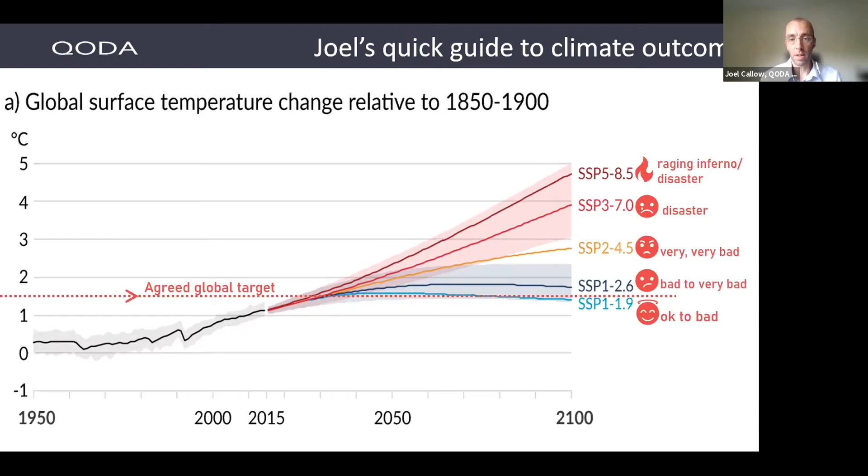And I would suggest that the okay to bad scenario is probably our best bet to hit this globally agreed 1.5 degree Celsius target. So that's the biggie, 1.5 degrees. I think nearly all of us are aware of that reality now. That's what we're trying to do. And that's therefore what the rest of the presentation really is discussing. How do we get ourselves, our country and our entire planet down to a 1.5 degree climate change outcome in the future? So next slide, please.

Here's what has to happen. So this is the CO2 emissions of the whole of humanity, all added up together, which must have been a bit of a job. These, of course, are projected out from today through to 2100. And these are the scenarios the scientists use to predict what will happen to climate change. So they're not allocating likelihood to these scenarios. They're simply saying, this is what could happen if we do this or that or the other. And there's been a lot of debate about that in the papers. I won't say much more about that.

What I will say, though, is they're not very good at naming things. So the one we need is the little light blue line at the bottom, which is handily titled SSP1-1.9. I think that's not especially catchy, so I call that one the happy blue line. There's actually a slightly less happy blue line just above it.

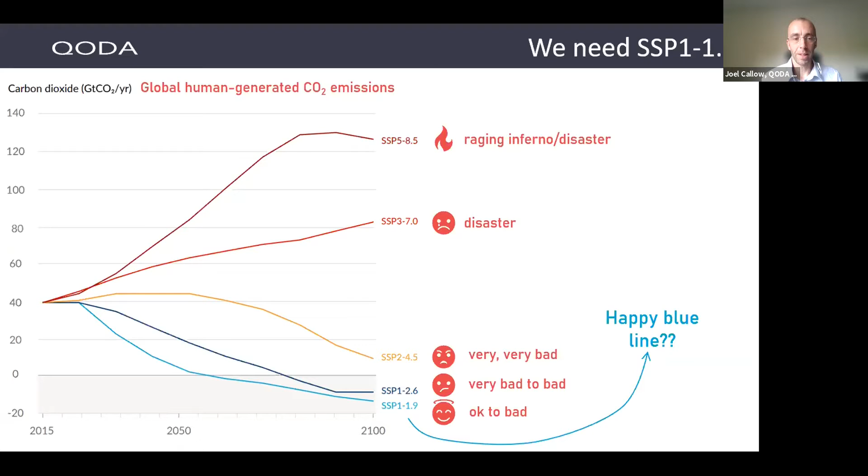But the happy blue line, or the light blue line, is the one that delivers confidently, or reasonably confidently as far as the scientists are concerned, a 1.5 degree-ish outcome. And then the other scenarios variously produce much, much warmer outcomes with much worse global impacts really across humanity. So we need the light blue line, a happy blue line, and we need to think about how on earth we deliver that. So next slide, please.

Just one more brief mention about climate change, and then we'll roll into the next part of this. That is to say that climate change is not a result of today's emissions, it's a result of all our emissions so far to today, and therefore what happens in the future too. We are heading up this line steadily, moment by moment, day by day, month by month, as we collectively emit more carbon. Normally flatlining is bad news. Certainly for human beings, flatlining is very, very bad news. But for cumulative carbon emissions, flatlining is exactly what we need to do.

So this line's got a gradient at the moment, it's heading up. What we need to do is stop emitting carbon so that all the cumulative emissions that have happened so far are all that then happens. So we reach global net zero, this graph becomes horizontal. And that's what the scientists need us to do. That has to happen before we hit the end of the blue band on the graph here.

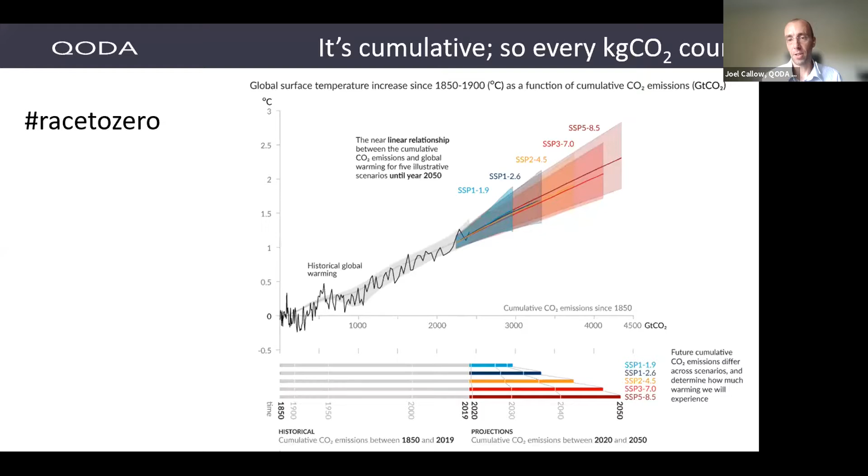So you can see we're working our way up through the blue band at the moment, and we need to stop emitting carbon before we get to the end of it, which is 3,000 gigatons CO2. So that's what we're trying to do. Cumulative carbon, every kilogram counts. So we need to cut now and cut hard. That's the message. Okay, next slide, please.

So next, we're going to zoom in a little onto this term net zero carbon, which is the title of today's session, and it's a term we're all very familiar with, although it was only coined relatively recently, and we talked about carbon neutral historically, so you may be familiar with that term. But today we're considering net zero carbon. What does it mean for us as buildings professionals, and what does it mean for everybody else as well? So next slide, please.

At a very basic level, net zero carbon isn't too difficult to define. It means we stop consuming any sort of fossil fuel, but specifically burning them, and by that we mean coal, oil and gas principally, though methane is also an issue. And instead of using those, which are a linear, non-cyclical consumption pattern, we move to a cyclical consumption pattern whereby the things we use regenerate automatically.

And that includes the materials we use, but crucially, the energy. So wind turbines, solar panels, biogas, and so on. Anything that can renew cyclically and continue to operate in perpetuity in the future is renewable. And that's what we need to swap over to globally. So far, so easy. Net zero doesn't sound too difficult. Next slide, please.

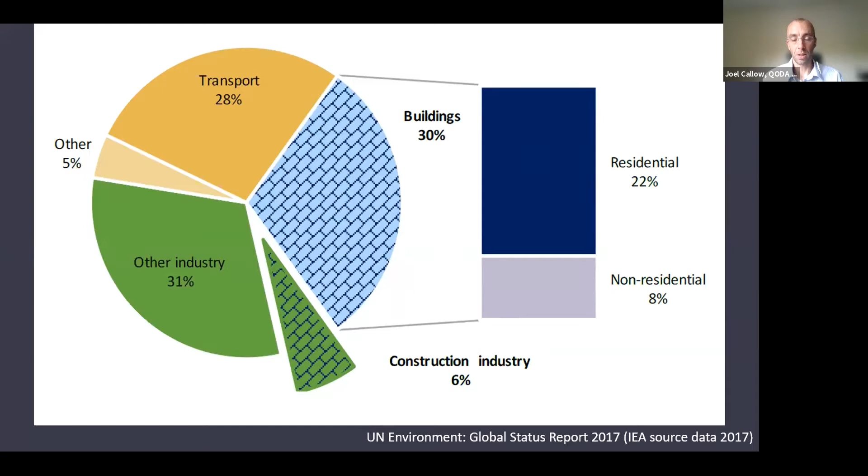But there are, of course, some challenges, and this is where we begin to focus more on our own industry, the industry of construction and building operation. So you'll see that constructing buildings emits about 6% of the global human carbon emissions total, but operating buildings, particularly residential buildings, contributes about another 30% to the global total. So buildings are, as you're probably all aware, a very, very substantial part of the problem, both operational, which we're focusing on today, and embodied carbon, which is the construction part of that pie chart. The next slide, please.

Okay, so now let's think about net zero operational carbon for an individual building. And this is where it gets a bit fiddlier, or let's say a building or a site, a collection of buildings. So we've zoomed right in from the global to the national to the local. And we're saying at this point, net zero carbon for us, and this is the sort of go-to definition I think that the industry is now using, give or take, is that over a given average year,

so this is a notional thing, not an actual thing at some level, over a notional year, the energy consumed by a building, demanded by it as a result of the things happening inside it, is balanced by the amount of renewable energy that that same building or site generates. And if those two balance over the course of a year, or indeed if the renewable energy is greater than the energy consumed or demanded, then you have a net zero or better than net zero carbon building. That's not 100% accurate, but it's the nearest we can get to a simple definition, I would say.

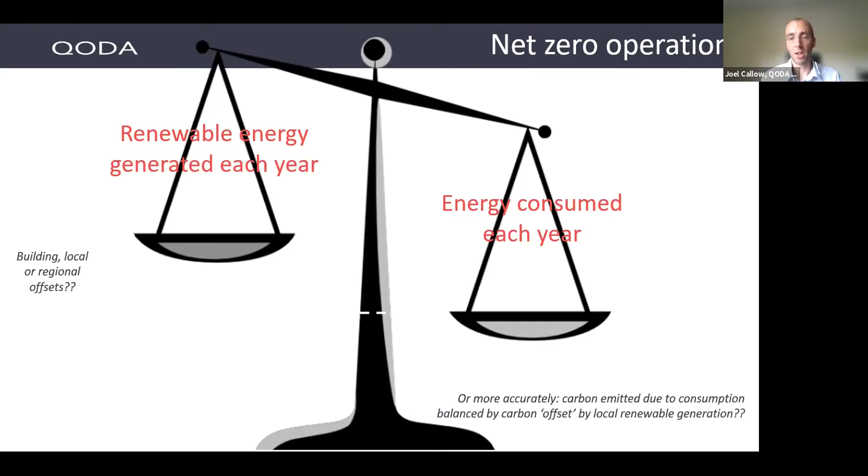This is ignoring things like offsets, and also it doesn't consider the idea that green tariffs via the national grid or gas grid have any real benefit to a building. So we're saying local balance between energy generated and energy consumed is net zero. Next slide, please.

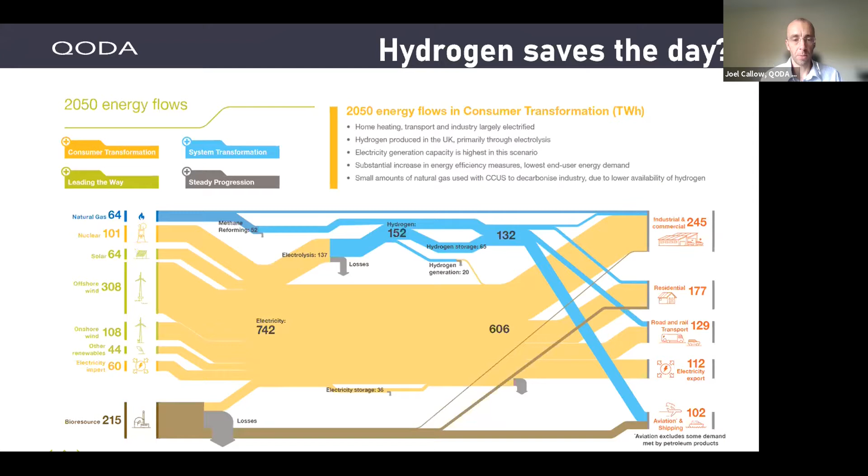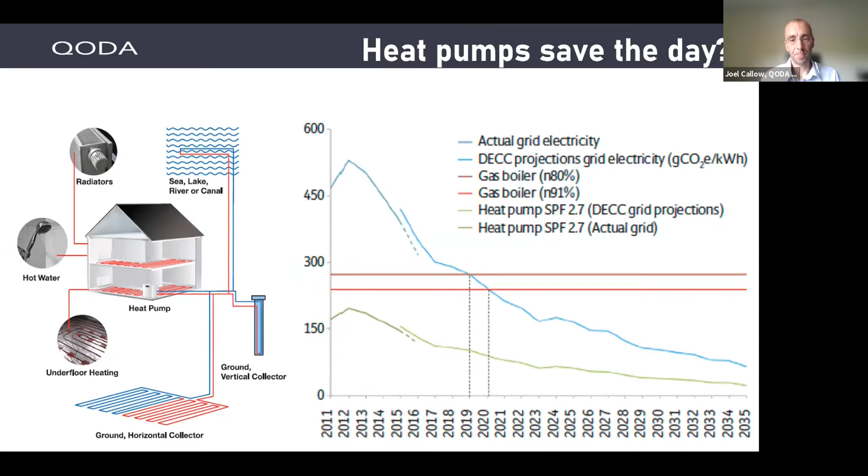Imagine we all switched off our gas boilers right now and went through this coming winter without any access to gas. And miraculously, we had 20 million heat pumps available that we'd all installed at the same moment, ready to use for the winter. What would happen is we would demand from our national grid enormously more electricity than is actually available at peak demand across the winter. Let's look at the next slide, and it explains that a bit more clearly.

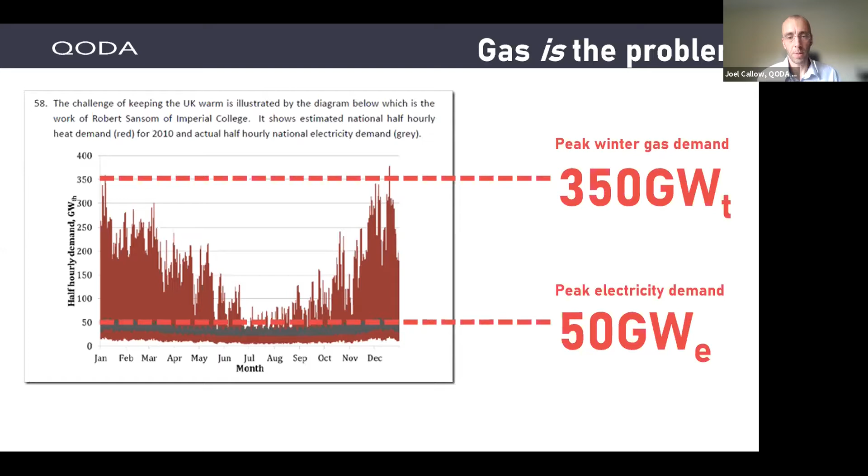So 350 gigawatts is our gas demand. That's the problem today. Got to switch it off, got to stop using gas. Gas is a fossil fuel. There is a biogas question, but that really hasn't got the scale to answer our 350 gigawatt problem. So even with super duper heat pumps, and I'm a big fan of super duper high efficiency, high COP heat pumps, you still end up with a peak demand of circa 120 gigawatts. And that's in addition to what we normally use electricity for anyway, including now charging electric cars.

So we've got a problem. What we need is a giant gush of electricity from a high pressure tap, if you like. What we've actually got is a trickle of electricity from not at all a high pressure tap. And we've only got 50 gigawatts available instead of the circa 200 we probably need all in for all of this going on at the same time. So we've got a capacity problem. We can't simply swap to heat pumps, in a way similar to the idea we can't simply swap to hydrogen because there isn't enough of it. We can't generate it easily enough. Next slide, please.

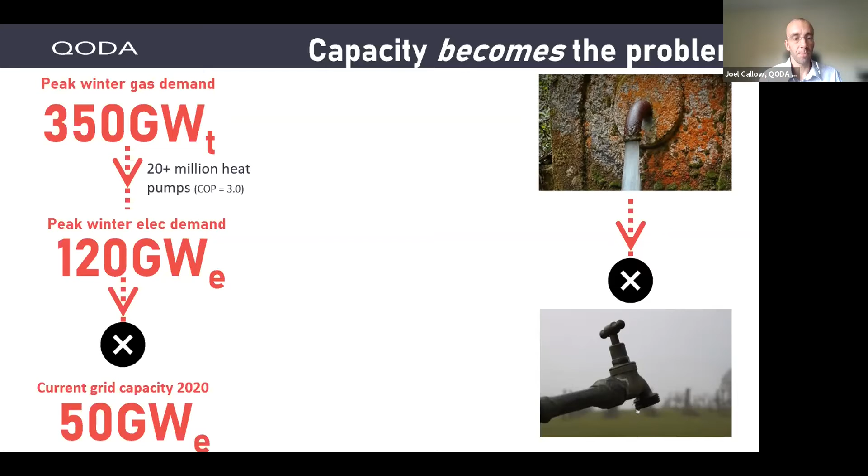So a summary of my points so far would simply be that we can get to net zero on electricity. The problem is there's not enough of it to heat our buildings, even in the best case scenarios, with as much hydrogen as we can muster and the very best heat pumps at the highest efficiency. We simply need too much heat for that system to meet all those energy needs. Therefore, we need to make our buildings less wasteful, both new buildings and all the ones that already exist.

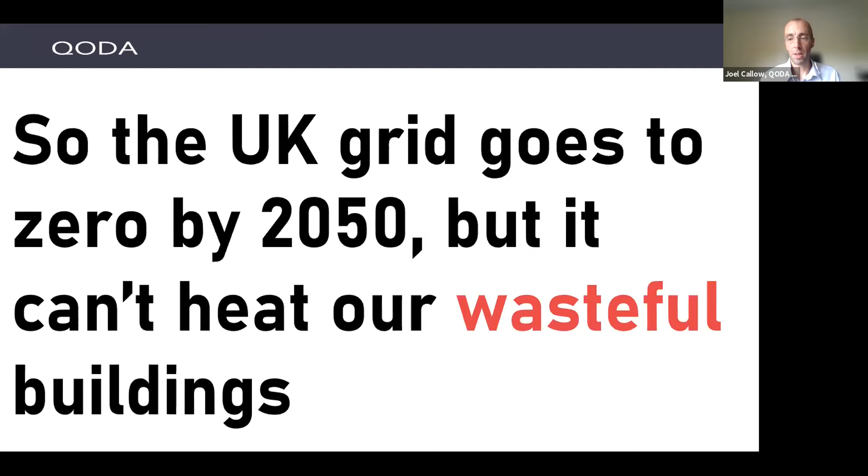There's another challenge as well, and that is that electricity is not cheap. Now, it may go down in price, and there are some projections saying that it will as renewable energy comes online in greater quantities. But on the whole, heat pumps cost more to operate than gas boilers do. That's partly because of the way gas isn't taxed and electricity is. There's some ways we can tweak this, and we can hope government policy follows those sorts of protocols. But overall, electricity is a much more processed fuel than gas. We just dig gas up out of the ground, which is pretty cheap, but we actually have to create electricity or convert energy into electricity from other forms, and that's generally more costly.

So we can't resolve fuel poverty with heat pumps. We have to address the amount of heat that our buildings need as well.

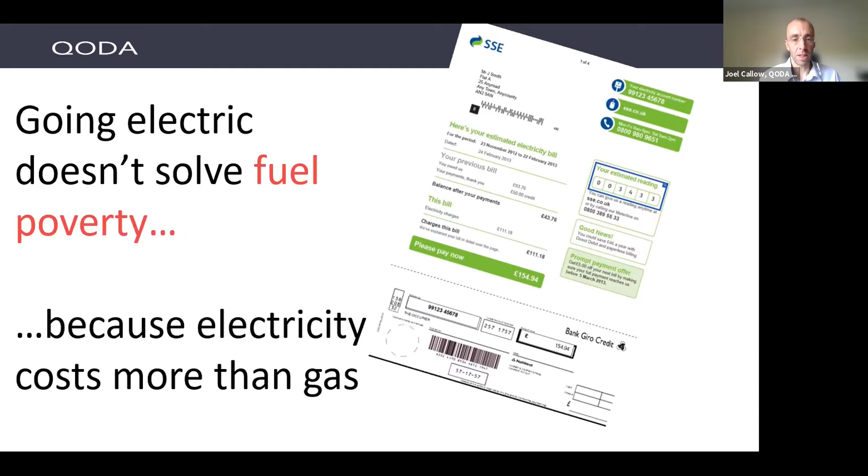In its worst form, concrete has a lot of carbon in it because of its cement content, although there are ways to make that better. Timber is an example of a fantastic material that has actually captured carbon, so has a carbon negative footprint in some ways. The industry hasn't really dealt with embodied carbon up until now.

I want to say very clearly that there are now quite good but complex answers to how we measure and minimize embodied carbon. And if we wish to build buildings with a very low embodied carbon footprint, we can do so, although probably zero would be a bit of a push at the moment for most projects. But it's a very new industry. So unlike operational carbon, which I've talked about for the last few minutes, which has decades of knowledge and case studies and benchmarks and regulation behind it, embodied carbon has none of those things.

And so we're kind of stepping out into a bit of a wild west of slightly unknown performance and a lack of case studies. There are a few, and I wouldn't want to do it down, but I want to warn you that this vital part of our total fight against climate change is much less clear than the operational carbon. So my final slide, please.

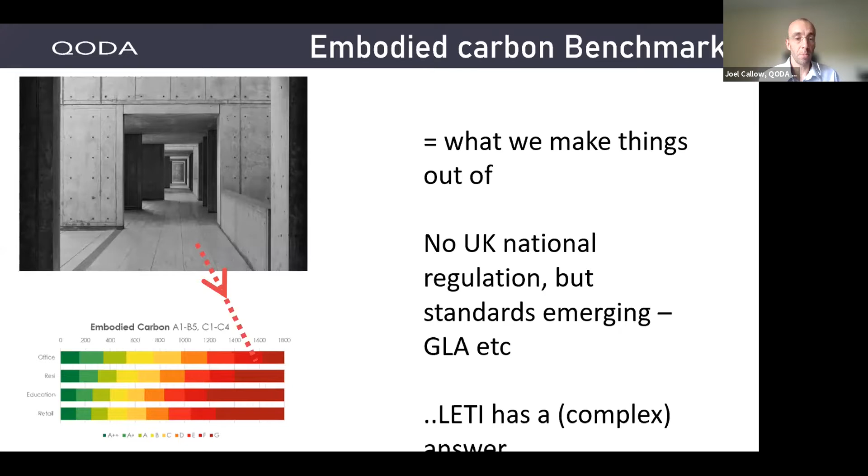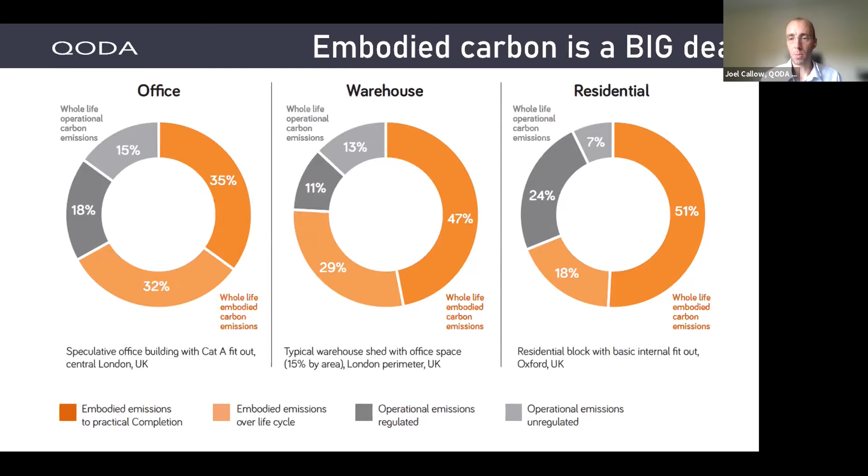So we can't ignore embodied carbon, but we need to be aware that it's an emerging discipline from a fairly low starting point. I think that's a great moment to hand over to Neil and Dido for some more buildings-focused input.

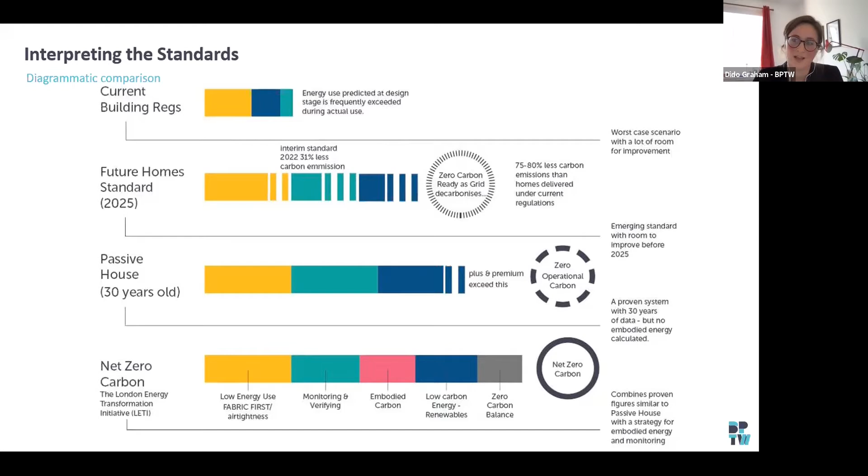This is a look at the LETI definition. LETI is the London Energy Transformation Initiative, and the key things to see are these figures. The low energy use, shown in yellow, is the operational standard we need to hit - that 35 kilowatt and 15 kilowatt figures are incredibly similar to what Passive House gives you. Other key elements are the measurement and verification points throughout the process.

This means ensuring you're measuring what you're producing, what the building's going to do during and after the construction phases - ongoing measurement of the building's performance. The pink section is the embodied carbon, measuring reductions so that everything coming to site and going into the building can be measured and quantified.

On the right hand side, the dark blue looks at the renewables that will be on site, balancing the energy your building is using with the energy you can produce on site. By creating these incredibly efficient buildings that aren't using much energy, you're able to produce the energy you need on that site.

The final element is about balancing your carbon - ongoing monitoring to ensure there's a continued balance and ecosystem of what you've done, staying in balance as you go forward.

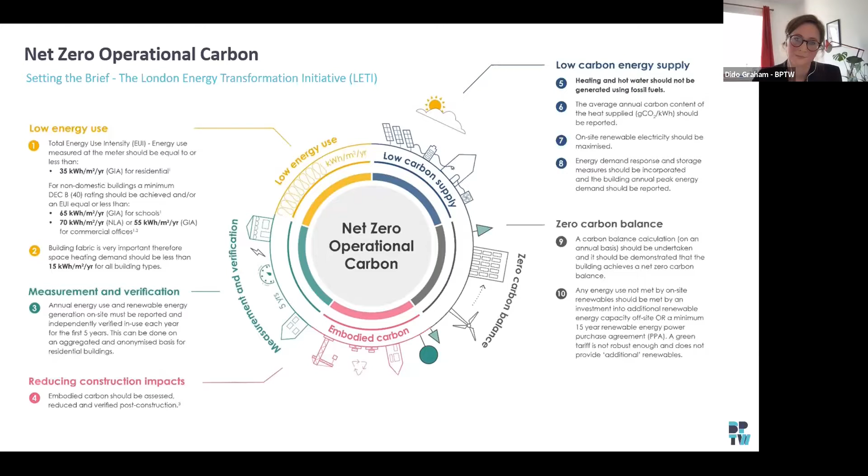This slide is taken straight from the LETI Client Guide, an excellent document to help clients understand how to approach a net zero building. It explains the collaboration that needs to happen and the thread that needs to follow through the whole process, from stage 0 RIBA standards to stage 7.

It also looks at the myths and the problems that clients have raised as issues with net zero buildings - for instance, the cost increase. There's a study by UK GBC looking at the price increase, which is around 3.5% more expensive to produce buildings like this.

But if you balance that out against the benefits you're going to get - not just economical but social benefits, and economical in terms of the energy you're using - it comes out less overall probably. This diagram looks at when the client needs to be involved and their level of involvement with the team throughout the process.

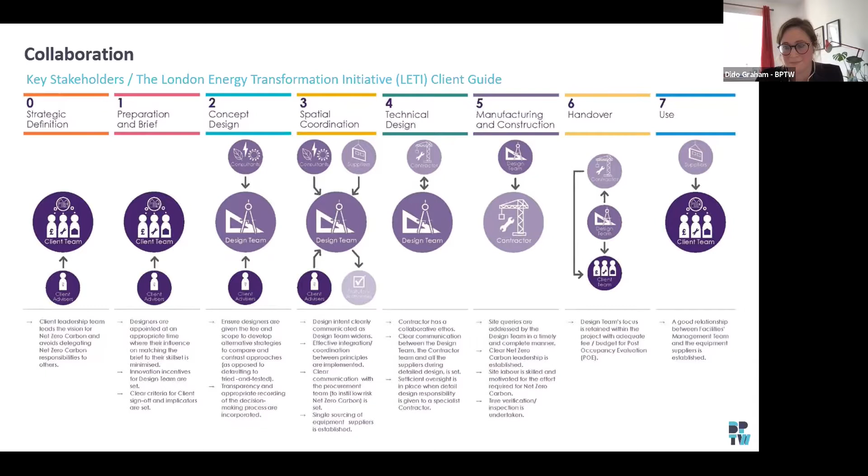As I said on the first slide, how do we go about achieving these figures and hitting the targets? We like to think that the Passive House system is a really good way to do that - creating very thermally efficient, intelligent buildings using the site and thinking about designing well to achieve these things.

But what sometimes gets forgotten when we're talking about net zero is what this actually produces for the people living in these buildings. It creates very comfortable, easy to live in buildings that are easy to run, have longevity, and are really comfortable to be in. That's a really key thing to keep in mind when thinking about this process.

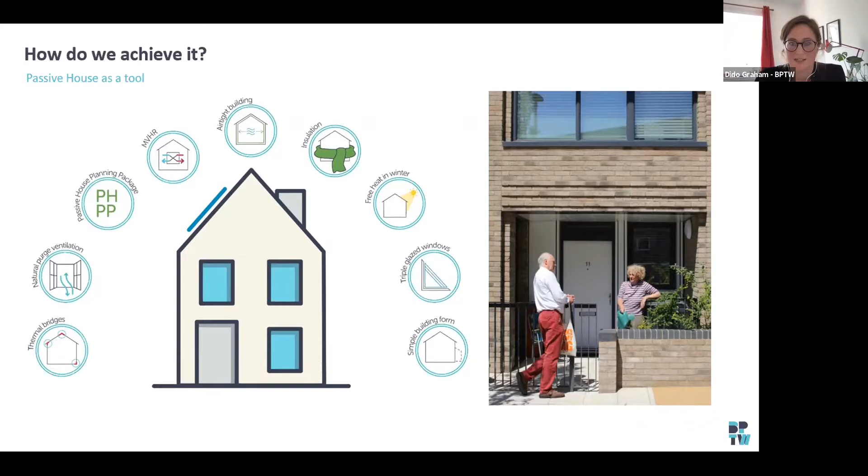This looks at the elements of the design process. The first thing to think about is the site and what you've already got there that you can use to your benefit when designing - orientating the building to gain free heat in the winter, checking if there are trees on site for free shading, and whether there are existing materials or buildings you can reuse to keep embodied energy levels down.

And Neil's going to talk about this building on the right-hand side. So there's an example here, Shakespeare House, that we undertook quite a number of years ago now, but I think it's more to make the point that it's not about new buildings all the time. In this case, this is reusing existing buildings. So this was an existing building within an estate, and we overclad this building, reorganized the internal arrangement, and actually put an additional floor on the top.

And what that did was massively increase its thermal performance. We were able to carefully design the fenestration to regulate the solar gains, etc. Add additional areas for amenity, etc. So there are additional benefits just in terms of actually how the building is used. But overall, what that did was extend the building's life for another 30-40 years without knocking it down. And it sits very well in the context of the existing estate. Some of the buildings changed, some of them didn't.

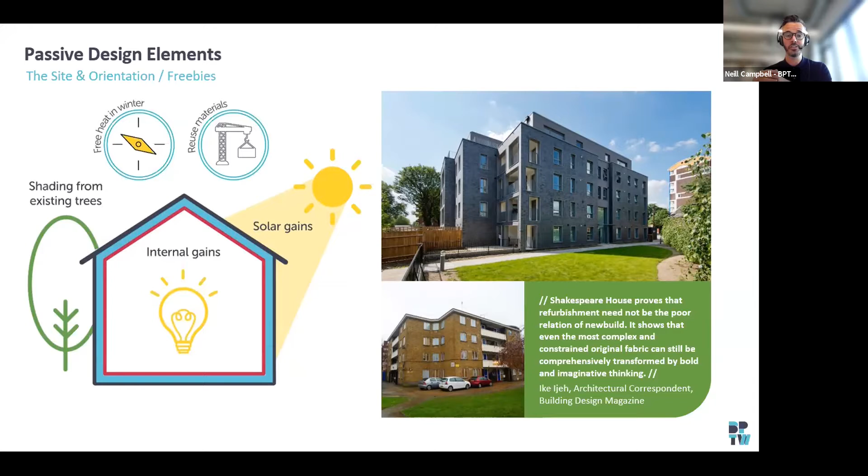So I think what's quite interesting about this, and the briefs that we get, is it's not always about having to knock something down and start again. And that certainly plays to the point about the embodied carbon that would have been ingrained in that building and lost if it was knocked down and then a whole new building put in its place. Okay, next slide, please.

So the next element is thinking about the fabric. I like to think of this like a leaky bucket. If you've got a bucket with a hole in it and you're consistently pouring cold water into the top, it's going to leak out the bottom. So if you can think of the building fabric a bit in the same way, we need to keep that heat inside the building. And how do we lose heat? We lose heat through air transfer, so drafts and badly connected pieces of the building, and also through the fabric. So when one solid material touches another solid material, or there's a connection between the outside and the inside. So how do we avoid that?

So thinking about a highly insulated envelope, keeping the envelope airtight, and also the elements that we put into the site, thinking about detailing very carefully so you're not getting thermal bridges, and also using high quality elements like triple glazed windows that, instead of being your worst element in the building for losing heat, could actually be something for gaining heat. So in the winter, get your free gain, so you're not needing so much energy. Also, obviously, the other things to be aware of are keeping the elements out, so rain protection and wind protection and the normal things that you need to do with the outside of the building. And then that helps to ensure that the energy that you're putting into the building is relatively low and stays in when you've put it in.

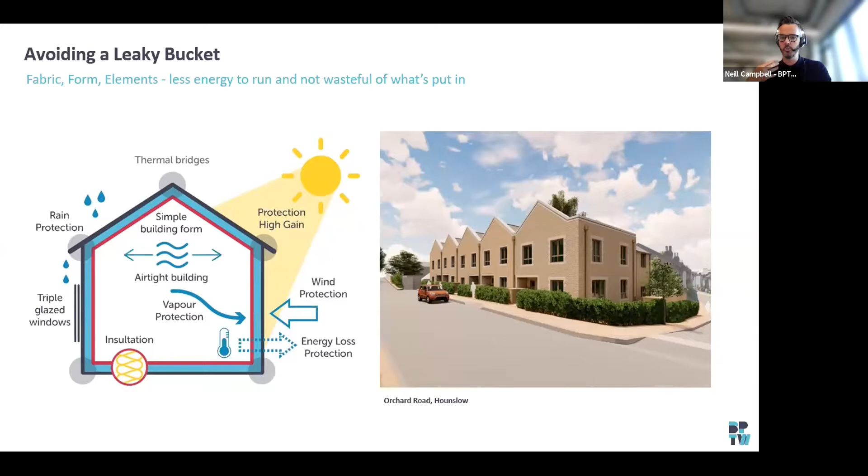Next slide, I'm sorry. And just to touch on quickly, an example of exactly all of those points, which we undertook with Hounslow Council directly, this was very recently. So in this case, our brief was designed to Passive House principles, so not to full certification. But what that meant was that we used those principles through the design to maximise the performance of the building to a very high standard. So here there's triple glazed windows, simple repeated form, very highly efficient thermal fabric, and that is borne out in the architecture, and it creates very simple, beautiful architecture in our view. The next slide, please.

So then you've created yourself an envelope that holds your heat in and is fairly airtight and isn't leaking lots of heat out. So how do you ventilate that? And I think one of the things that people are most concerned about when you talk about passive house or net zero carbon buildings is the idea that you can't open your windows. And I'm going to talk about why that isn't true.

So you have these MVHR systems, which is mechanical ventilation with heat recovery, which is a way of ensuring that all the pollutants that you're creating inside the building are extracted, but you don't then bring very cold air into the building, and you don't lose any of your heat out of that system. So you're bringing cold air in, but it passes the warm stale air that's going out and comes up to the same temperature as the building. So then you've got fresh warm air coming into the building using this system.

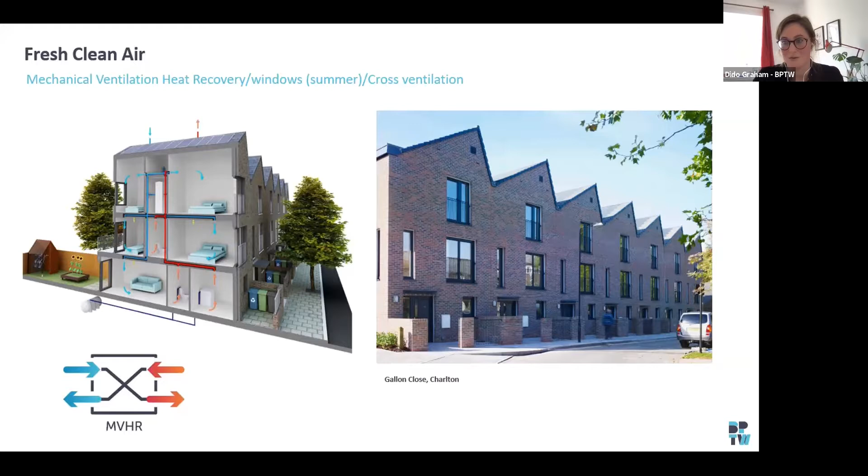But then in the summer, if you're wanting to open your windows, or if you're wanting to get cross ventilation into the house, that's totally possible, and you should do it. But I think the thing to remember is that because we've made the envelope so incredibly thermally efficient, it works both ways. So in the winter, it's stopping the heat escaping, but it's also stopping the heat coming in the summer. So you may not need to, I think, is the thing to remember. Next slide, please.

Okay, so the final piece of this puzzle is the fossil fuels element. Obviously we're trying to reduce the number of fossil fuels on the site, or remove them completely, and we're trying to balance the energy that the buildings are using and what's being produced on the site. So by creating this incredibly thermally efficient building, the amount of energy that you need to produce on the site is actually less than what you would need to produce previously.

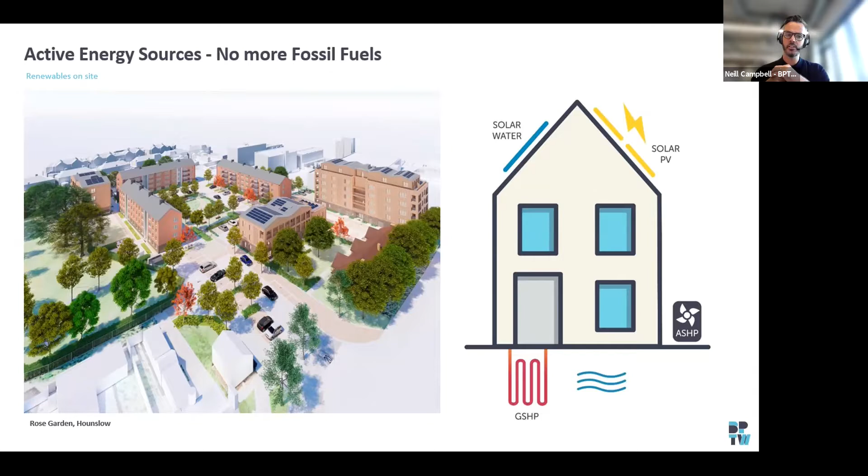Next slide, please. So in summary, I think it's really important to remember that this process isn't just providing net zero carbon buildings, it's also providing healthy and comfortable places for people to live, which have high performance and are efficient and intelligent. So it's improving the current building standard and quality of the buildings that we're producing. There's also an efficiency in the form, so you're going to make economical savings potentially in the construction of the buildings, and they're much more economical to run.

So there will be a reduction in fuel poverty, which I think is incredibly important at the moment, especially given the current news about gas prices and electricity prices rising, and also a longevity in the developments and the communities that are being created, because the fabric of the building has much more longevity, because it's not going to be damaged by bad detailing or those sorts of things. And also accountability and learning through monitoring what these buildings are doing. The ongoing monitoring means that you have a better understanding of how your buildings are performing than you would currently.

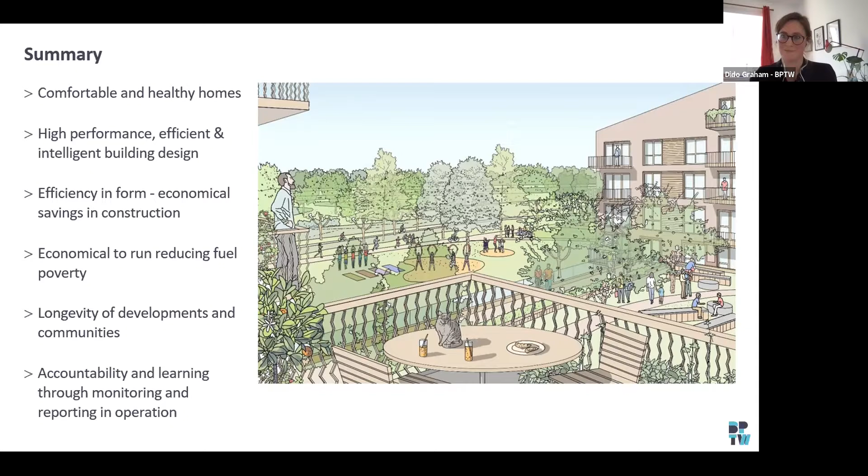That's it. Thank you. That's great. Thanks very much. So thanks very much there to Joel Callow from Coda, Neill Campbell and Dido Graham, both from BPTW Architects. Fantastic, really good walkthrough. We started very big picture, but we've got into some of the technicalities of the challenges of actually making net zero design happen.